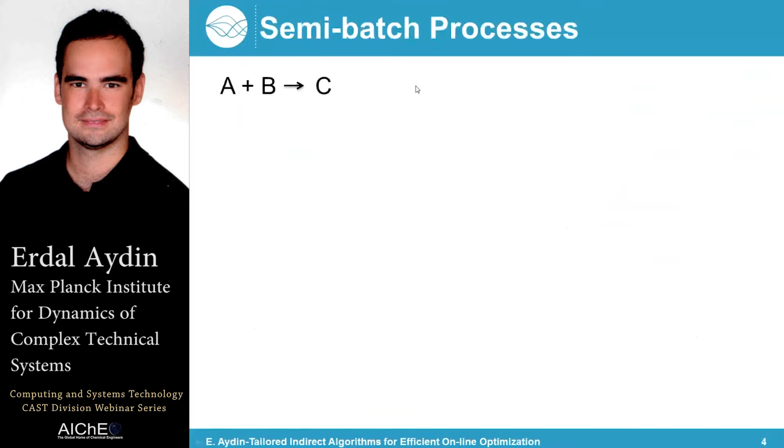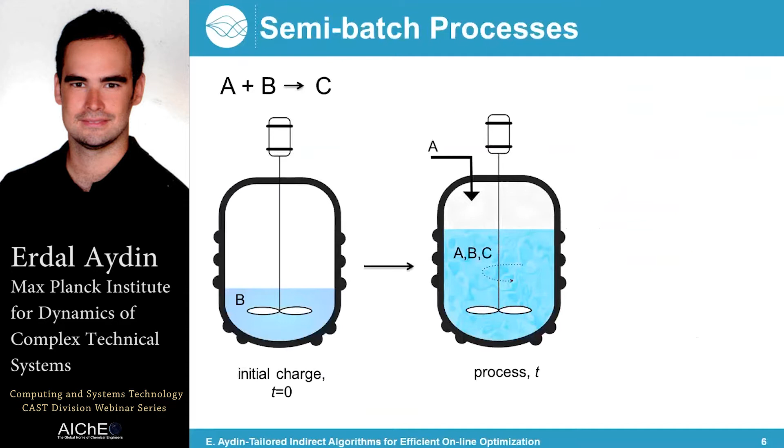Okay, let's start with the semi-batch operation. So let's assume an elementary reaction where A and B go to C. We would like to operate semi-batch wise. So we start with some of the raw materials in the reactor when time is equal to 0. Then we basically feed some of the raw materials inside the reactor. This can be a one-phase, two-phase, or multi-phase system.

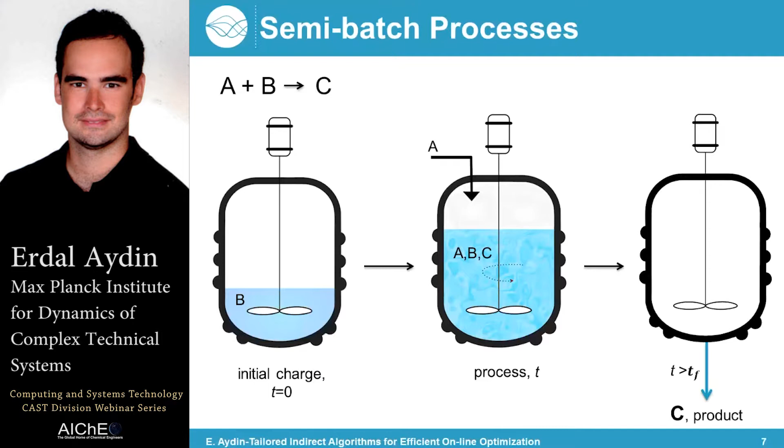We basically employ the process. And at the end of the day, after the final time of the process, we get the product C after maybe some downstreaming, or if you're lucky enough, just at the end of the batch time. Typical examples are pharmaceutical industries or some biopharma applications. Car driving can also be considered a semi-batch process, as well as cooking. And nowadays our microchip industry works quite a lot with semi-batch processes.

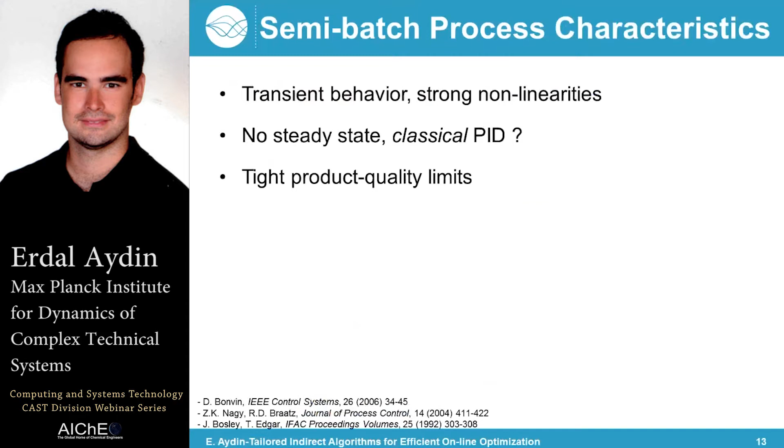So what are the characteristics of these processes? Well, they have quite transient behavior and strong nonlinearities. In addition, they don't have any steady state, which puts a question mark on classical PID algorithms. We have tight product quality limits to be able to sell these products. And one of the problems is that our flexibility reduces with time as the batch goes on.

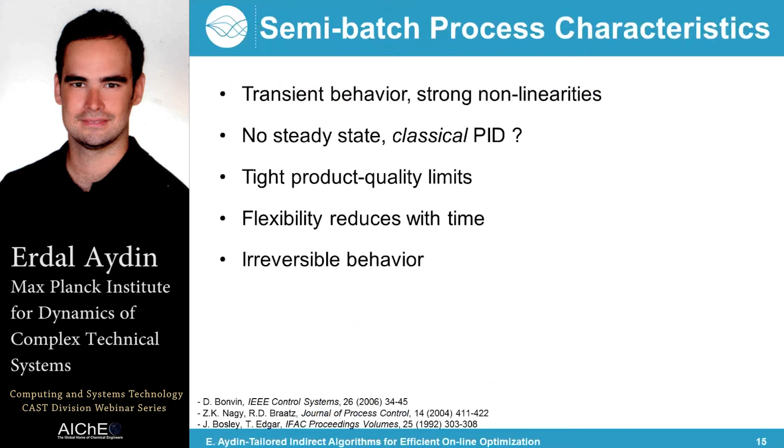So if you have any problem in the beginning of the batch, and since we also have irreversible behavior, at the end, if you're making a mistake, we usually end up losing the batch. And we have quite some uncertainty in our model equations and limited measurements. So in the literature, shrinking horizon NMPC is prescribed as a solution technique to tackle these issues.

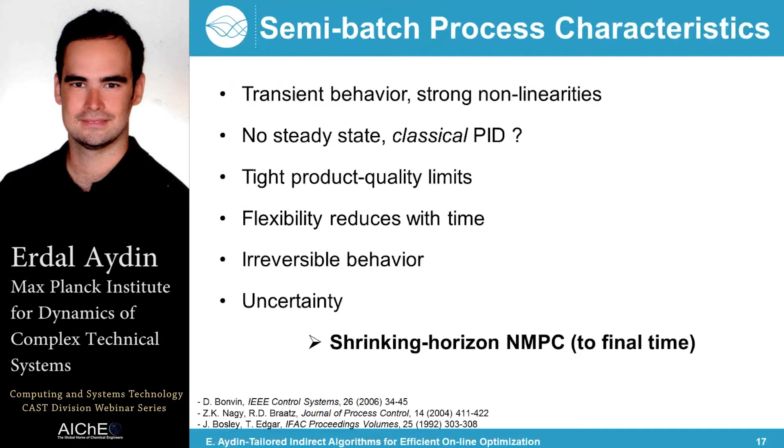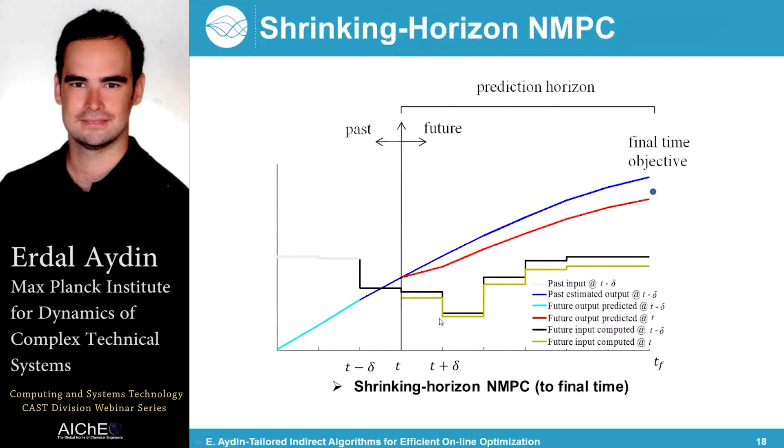The idea is basically to do dynamic optimization always until the end of the batch time and update our optimal inputs at each sampling instance until the final time. It's basically doing successive dynamic optimization and doing some estimation or measurement until we reach the final time. So let me elaborate this with a small simulation case.

So we basically have a cost function in our dynamic optimization problems, which can always be formulated at the final time of the state values. We have equality path constraints, usually given as ODEs for semi-batch processes, with pre-given initial conditions. In addition to that, we have some inequality path constraints to be satisfied at each time instance, as well as some terminal constraints, which should only be satisfied at the end of the batch time.

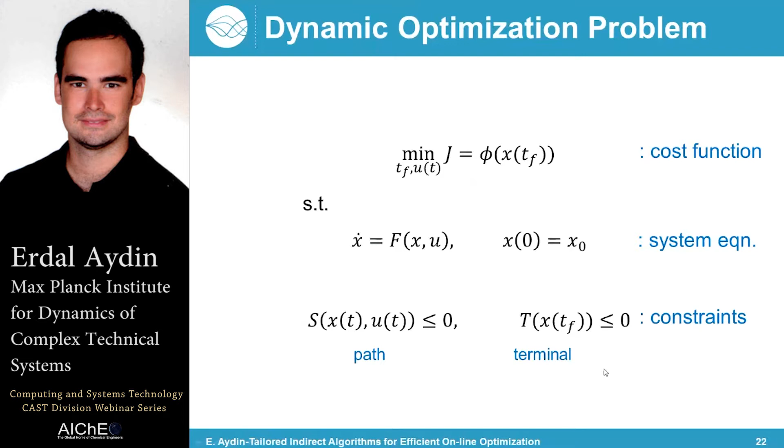So, numerical solution methods for dynamic optimization problems can be divided into two topics. One is the direct methods, and the other one is the indirect methods given by the Pontryagin minimum principle.

So the direct methods are usually called first discretize, then optimize, whereas in indirect methods, we basically optimize the problem first and then discretize to get the optimal solution. In direct methods, we can also talk about two main branches, which are sequential and simultaneous methods. In sequential methods, we basically discretize our inputs, but integrate our state equations to get the optimal solution.

Basically, we're doing integration until we reach the optimal point. But since we're trying to also make our path constraints feasible, this method can sometimes be considered expensive for inequality path constraints. In terms of simultaneous methods, we both discretize our inputs and state equations. There is usually a trade-off between approximation and optimization while we're going to the optimal solution, but simultaneous methods are known to be usually efficient for large-scale problems.

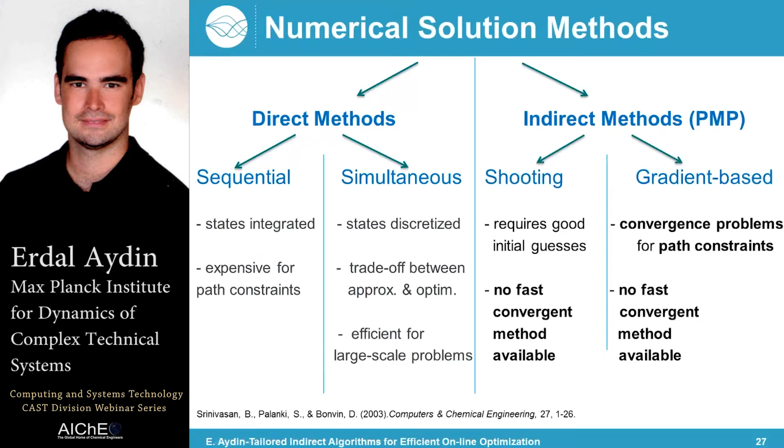In gradient methods, we usually do not require that good an initial guess, but these methods are also known for having convergence problems for path constraint problems, and they also usually turn out to be slow in the literature. So today I will propose a convergent method which is tailored to be efficient for path constraint problems.

Now a few words about shrinking horizon NMPC again. In shrinking horizon NMPC, we always need to employ the dynamic optimization until the end of the batch time. If we use direct optimization methods to do that, we need to employ expensive matrix factorizations due to large prediction and control horizons, or large input discretization levels, which means large prediction horizon lengths. Due to these matrix factorizations, the computational complexity usually increases as the cube of the time horizon.

Now, if we talk about direct interior point simultaneous methods, this is the linearized KKT matrix that we need to solve. The last row can be eliminated and solved explicitly during the iteration, which brings about this symmetric linearized KKT matrix.

The optimization methods available in the literature can be exploited to be efficient, like using their sparsity, special linear algebra, or cyclic reduction, especially from the group of Professor Biegler and Professor Zavala. This is a hot topic right now. There are also works proposing sensitivity-based updates for these methods, advanced step or real-time tailoring algorithms from the group of Professor Moritz Diehl. These are other ways of dealing with matrix factorization costs.

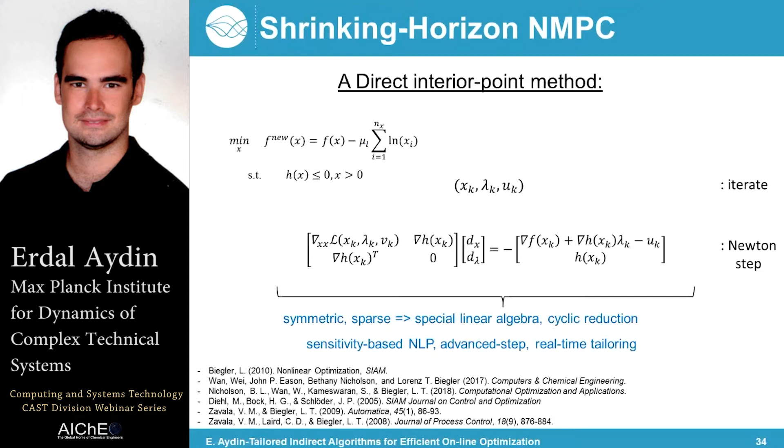But today I will talk about an alternative way using indirect methods to deal with this computational complexity. If we can tailor these indirect methods, we can get the computational complexity to increase linearly with the time horizon. Professor Mark Cannon from Oxford has already published papers on this for input constrained linear systems. But we will extend this method to be convergent for path constrained, nonlinear dynamic optimization problems. And we hope to get real-time computation faster than commercially available methods.

Okay, so this was basically about dynamic optimization. Now let's move on to the tailor-made indirect methods. Pontryagin was the person who proposed the Pontryagin minimum principle, which was basically the extension of the Euler-Lagrange equations.

The interesting thing with Pontryagin is that he lost his eyesight at the age of 14 due to an oven explosion at his home, but he was able to finish school and became one of the most well-known mathematicians of the 20th century, and his mother was the one reading books to him when he was studying.

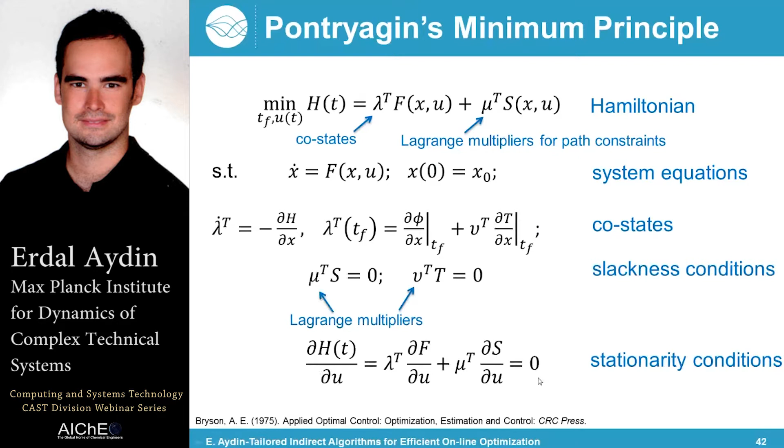So please recall that I mentioned the indirect methods can be non-convergent for path constraint problems. The reason is actually these Lagrange multipliers. You can see that we know the dynamics of other multipliers, but we have no clue about mu values. And if we try to update them at each iteration by using some shooting method, this can be costly. And at the end of the day, we may not even reach an optimal solution. We may not converge.

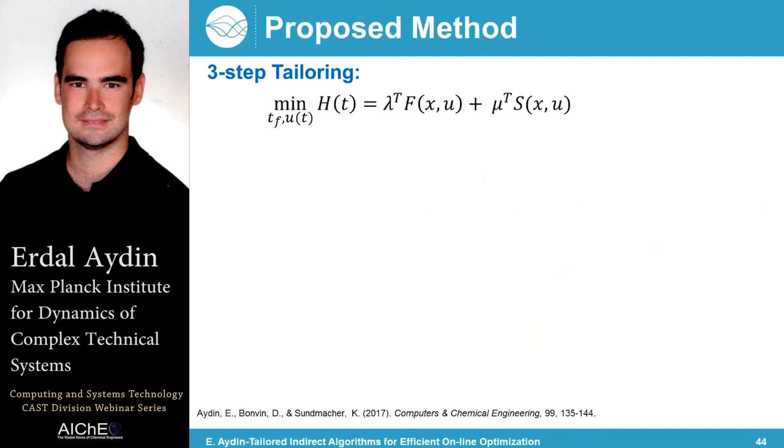So we basically propose a 3-step tailoring algorithm to cope with this issue. The first step, let's say that we're not that much interested in the exact value of mu. We just choose a penalty value or tune a penalty value to ensure feasibility, as a version of barrier type, instead of parameterizing and shooting for this value.

And let's say that we use some logic conditions. If you're inside the feasible region, we set this value as 0 to satisfy this KKT condition. Or else, if we are outside the feasible region, if our iterate is infeasible, we just tune a penalty value to be used for this, as well as for the terminal constraints.

Secondly, we propose indirect adjoining to be used for pure state path constraints. By pure state path constraints, I mean the path constraint is only dependent on the state values. So we basically take the time derivative of this until we get the explicit inputs inside it, and then replace the original path constraint with the indirectly adjoined path constraints. So we know that this value should be 0 at the KKT, and also its derivative should be equal to 0.

Let me illustrate that with a case. So let's say that we have a tank. We're basically dosing some water inside it. And we have the path constraint that the volume should be less than or equal to 1.1 liter. So our original constraint is V minus 1.1 less than or equal to 0. We take the time derivative, and we have V dot less than or equal to 0.

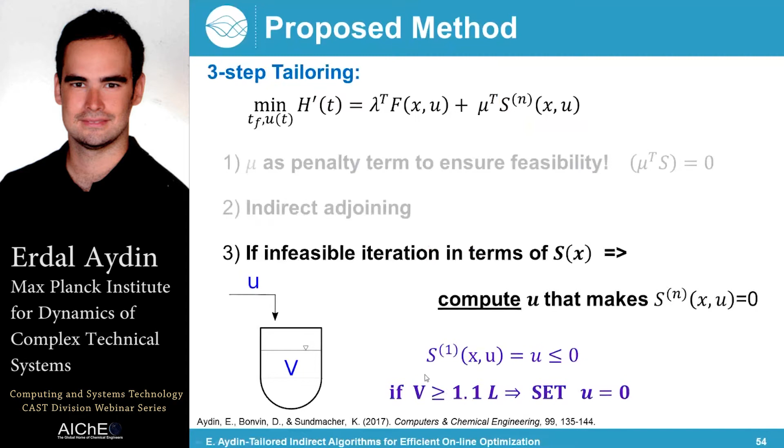So let me go back to our tank example. Our constraint is on this U. So if the volume is higher than or equal to 1.1 liter, we basically set U equal to 0, which makes sense, right? After this point, we don't dose, and we keep this feasible.

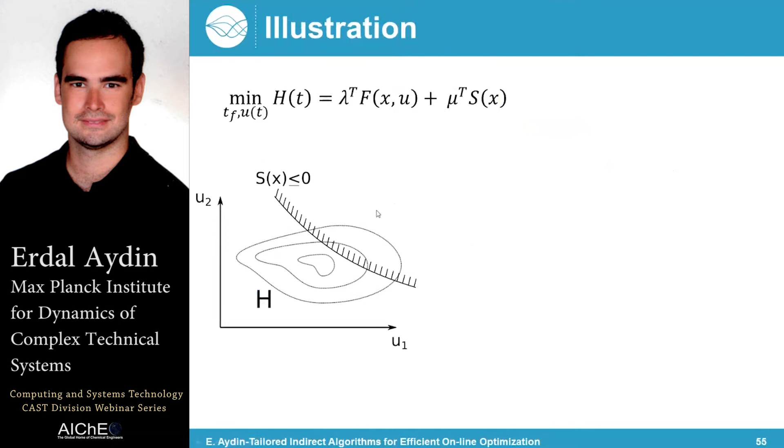So one last illustration about this. This is our original path constraint and the original problem. We reformulate it by using indirect adjoining like that. And then, at some infeasible iteration, we basically put the iteration to be active on this path constraint. We will see that for semi-batch problems this will work, because usually the optimal solutions of semi-batch problems are designated by active path constraints. I will be talking about this in a bit.

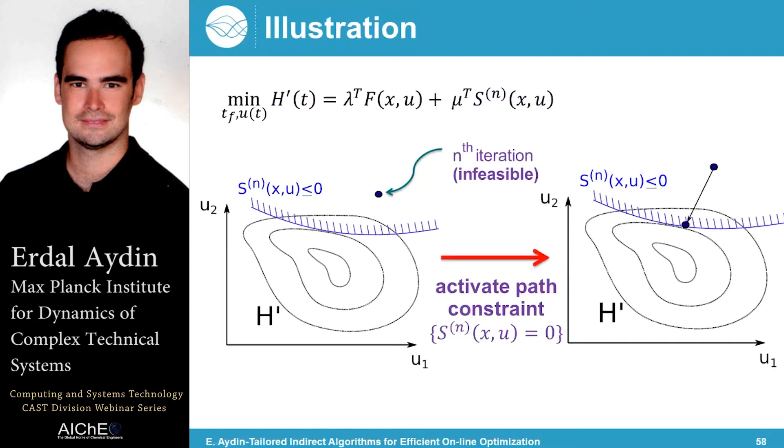Okay, so by doing this three-step tailoring, we reformulate the original indirect problem, and we use logic decisions to activate the path constraints. That's why we can eliminate the mu values from the problem. And we basically integrate for lambda dot, the adjoint multipliers, and the state equations. And at the end of the day, we are projecting the gradients related to the indirect methods, and we can solve the original problem as an unconstrained optimization problem by using some quasi-Newton algorithm. So basically, we just need to update the input values in this iteration scheme.

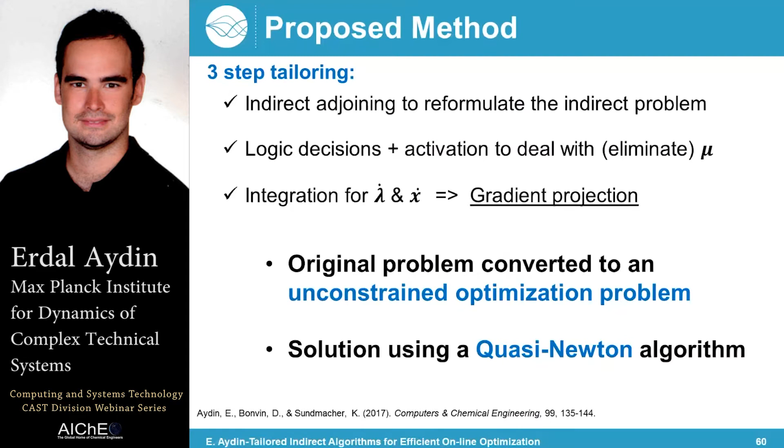Okay, now let me move on with our first case study taken from this paper in the literature. We have a fed-batch reactor. Our aim is to optimize the amount of C at the end of the batch, which is half an hour. D is the product that we don't want. So we have some input constraints for this dosing. We have temperature limits on the batch reactor.

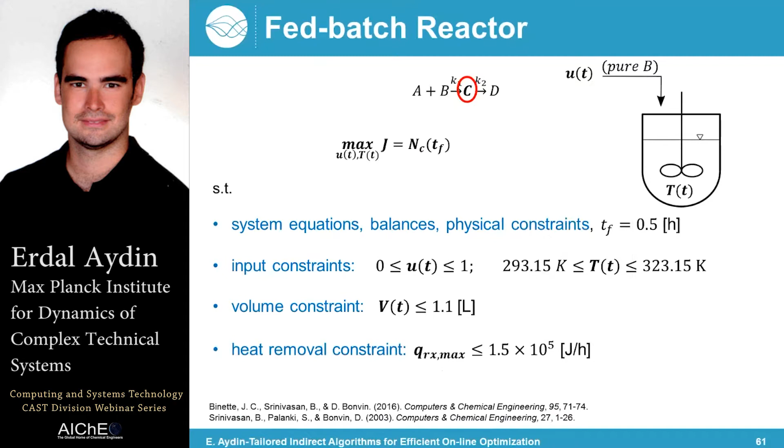Semi-batch reactor. We have a volume constraint that we just talked about, and we have some heat removal constraint, which is basically 1.5 times 10 to the 5 joules per hour. We shouldn't reach this value during the operation. All right. So we solved this problem by the proposed PMP-based method, and we took the analytical solution number 2 from this paper published in Computers & Chemical Engineering 2 years ago.

So if you solve this problem by these two methods, we can see that we don't get the exact optimal values, but we get the exact sequence of the optimal inputs. So both dosing and temperature behave the same in terms of solution arcs, and at the end of the day, we get very similar optimal solutions. So we basically approximate the optimal solutions here, but since we have very similar cost values, we can say that it is catching the optimal behavior in some sense.

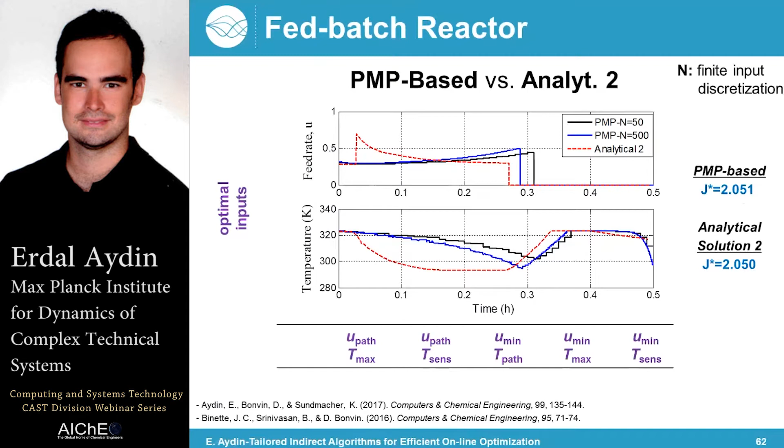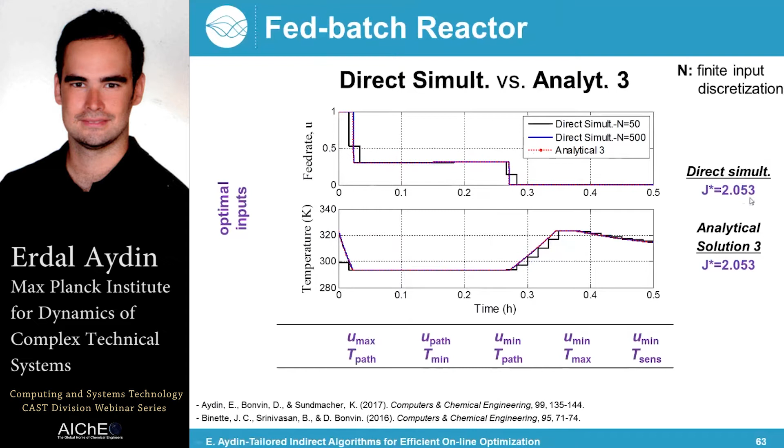We also solved this using a direct simultaneous method by using IPOPT and compared with the analytical solution number 3. We see that both also propose a different input sequence than the analytical solution 2 and PMP, but at the end we also get very similar optimal objective values. So we can say that we get different local solutions with all methods actually, different five-arc type solutions, but we can get nearly the same optimal costs with considerably different input profiles.

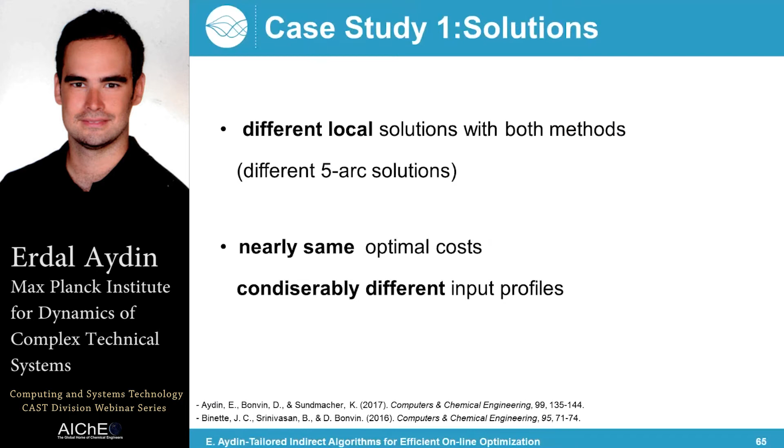Well, we saw that, but what about the computational time? If we compare the computational time with the direct simultaneous and PMP-based methods, we can see that when the discretization level is getting higher, our computational cost increase is not that considerable with the indirect, PMP-based method, whereas with the direct one, the computational cost is increasing a little bit faster. And the thing is, we need to solve these matrix factorizations for larger input discretizations.

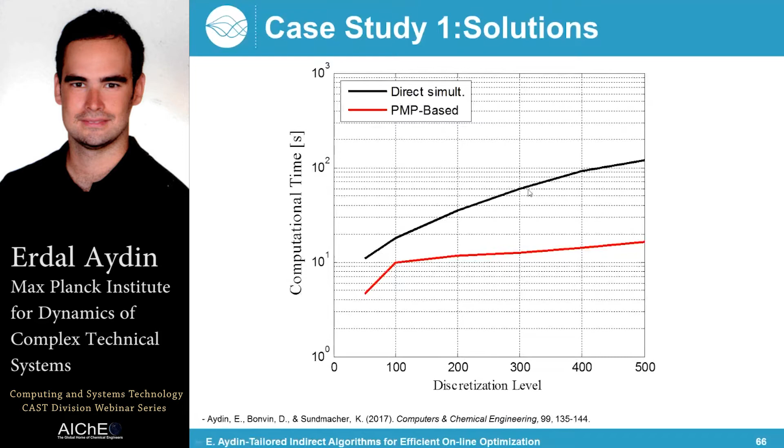This expands our matrices, and factorizing them is getting a bit more expensive than the indirect one. In the indirect one, we basically attach to integration, and we know that integration is efficient for higher input discretization, whereas these matrix factorizations are getting problematic as the horizon increases.

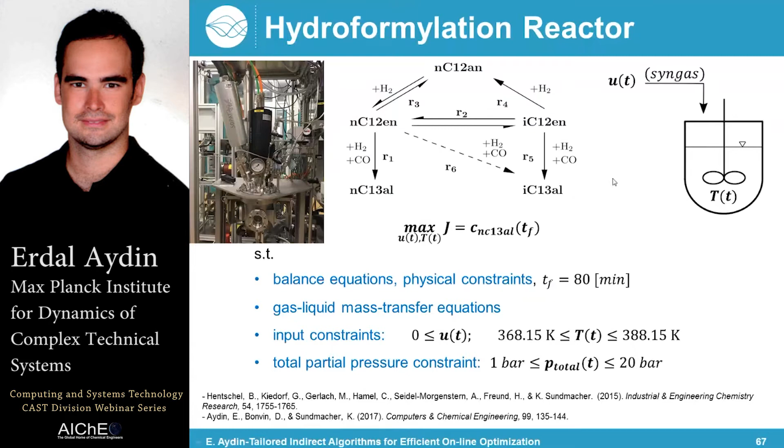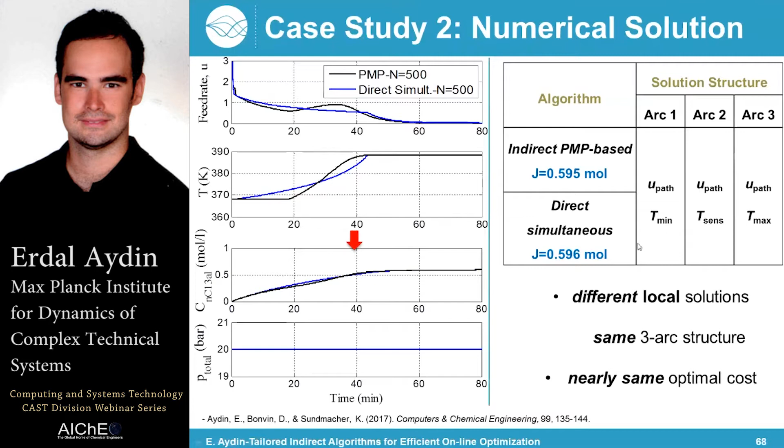But I need to again mention that this is an approximation, and since we are more interested in the online optimization cases, we basically stick with the speed of this indirect method, with very close approximated optimal cost values. All right. So this was basically the indirect algorithm, the first one that we proposed. Now let's move on with the online optimization case studies.

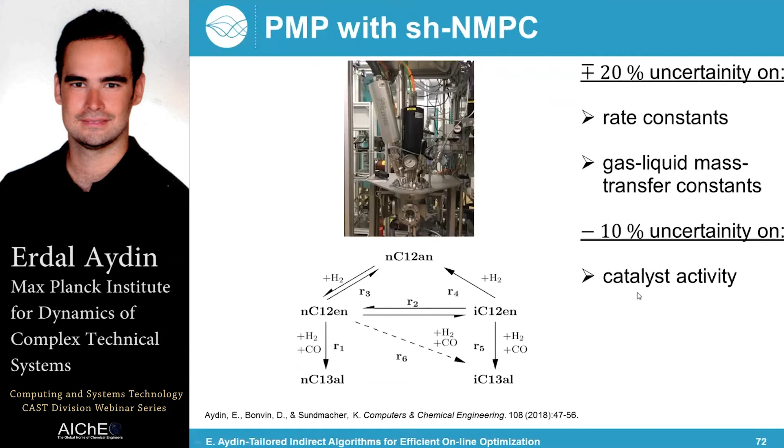So let's again go back to the hydroformylation case. Now we assume a parametric uncertainty on the rate constants of the problem, as well as the gas-liquid mass transfer coefficients, plus minus 20%. And we also assume an uncertainty on our catalyst activity. And we try to solve this problem by using the nominal optimal input we got, so by not taking the effect of uncertainty into account. Now, if we apply this, we see that our path constraint, our pressure constraint, cannot be satisfied, and we have a desired product level of...

So we have a loss of 15% desired product as opposed to the nominal case. That's why we say that employing some online optimization by using shrinking horizon NMPC can be more efficient in terms of production. And we do that to deal with the effect of the uncertainty on the path constraint. We basically employ some time-varying backoffs.

These backoffs can be computed by doing some Monte Carlo simulations. They are kind of computationally complex, but I need to mention that we can do it offline before starting the online optimization. We assume a 15-second sampling time, and we also introduce 5 seconds of measurement delay, which is more close to the reality with practical operations. We use a linear observer, and we introduce some white noise into our measurements.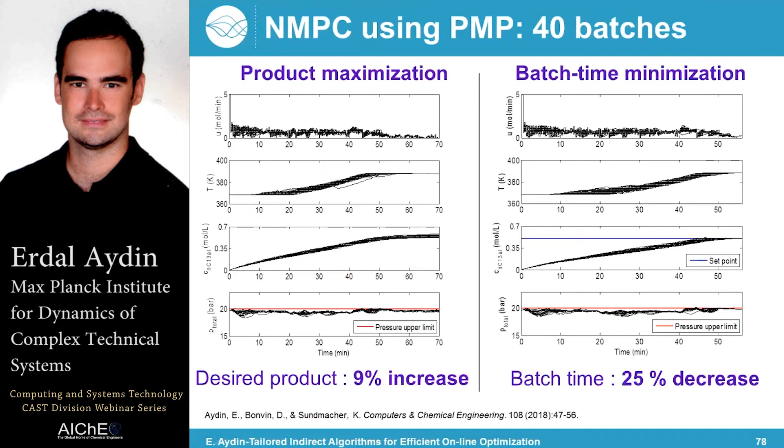All right. Now this was the fully parameterized PMP-based method, but we can also suggest a further tailoring method to be applied to this indirect method, which is called parsimonious parameterization. So in dynamic optimization problems of semi-batch processes, we see that an input solution arc can be either on a lower or upper bound of an input, like Umin or Umax. It can be on a path constraint, which activates this path constraint, and in this case, we can compute this value by system equations.

Or it can be inside the feasible region, and we call these kinds of inputs sensitivity-seeking arcs. So these four are the only possibilities for the optimal solution. We can categorize our optimal solutions by using these arcs. I also did that when I was talking about the case studies with the tailor-made indirect methods.

So we know that these sensitivity-seeking input arcs are usually hard to compute accurately because their contribution inside the sensitivity equations is quite low. And they also negligibly affect our optimal cost. So we're paying a lot of attention to compute the fine shapes, but at the end of the day, we're not getting that much improvement in our optimal cost.

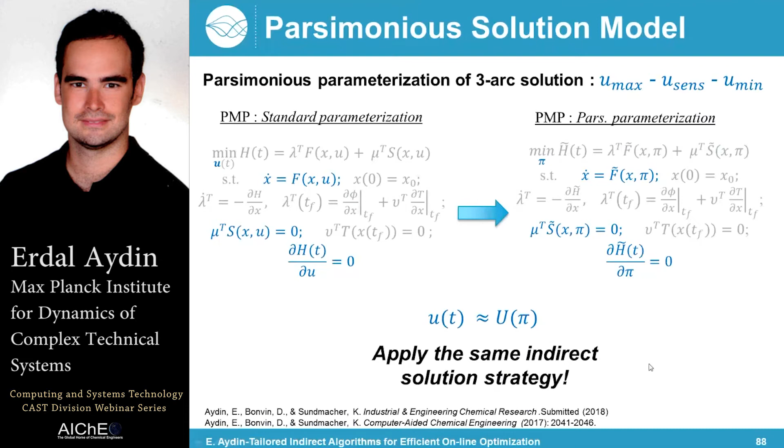Now, let me introduce the case study of a batch binary distillation column. It's a toy example actually; we basically have three stages. We assume a total condenser here. So we have the dynamic system equations and pre-given initial conditions. Our target is to optimize the distilled content at the end of the batch, so the value here.

We have the input constraints. Actually, we have only one decision variable. This is the internal reflux ratio, and it is constrained between 0 and 1. And if you want to solve this problem, we need to have terminal purity levels of a minimum value of 80% of the desired product here, and in the bottoms we shouldn't have more than 20% of the desired product.

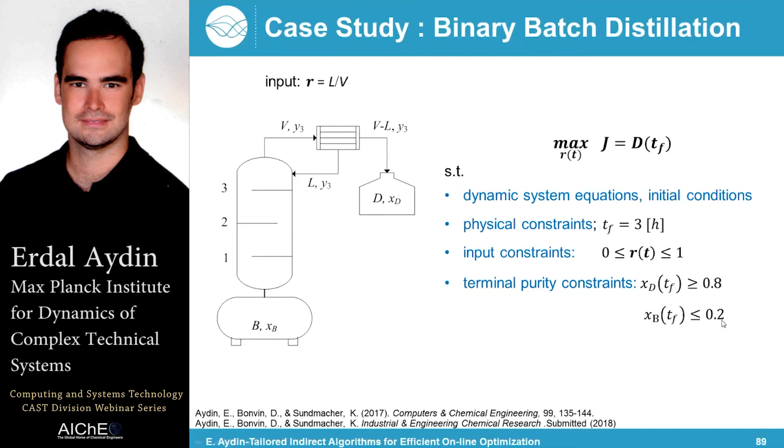First of all, we use the fully parameterized solution with 500 input discretization levels, and we solve the problem by using a direct simultaneous method. This is the optimal solution. We can see that our optimal sequence of inputs has three arc types, starting with the maximum allowable level, then following a sensitivity seeking arc, and finishing off with the minimum value. And we get something like 40.31 kilomole at the end of the batch time, and our distillate and bottom composition purity levels are satisfied.

Okay, now let's assume a constant value of the sensitivity seeking input, and we introduce some switching times. Here we can see that the solution switches at this and at this instant. So instead of the whole parameterized solution, we can map our input vector by only three decision variables here. And let's solve this problem.

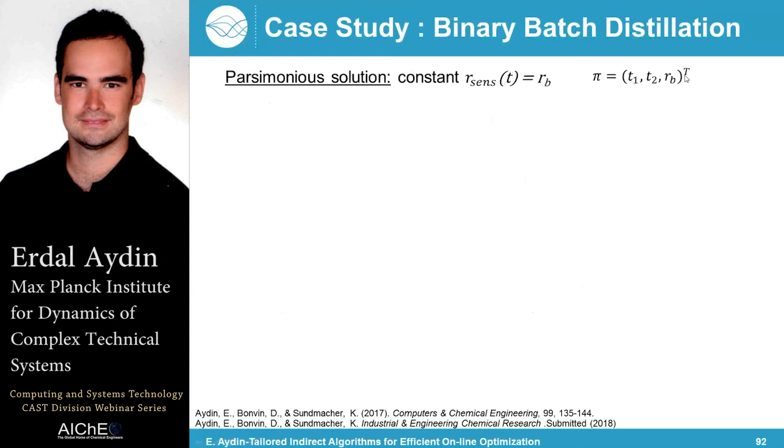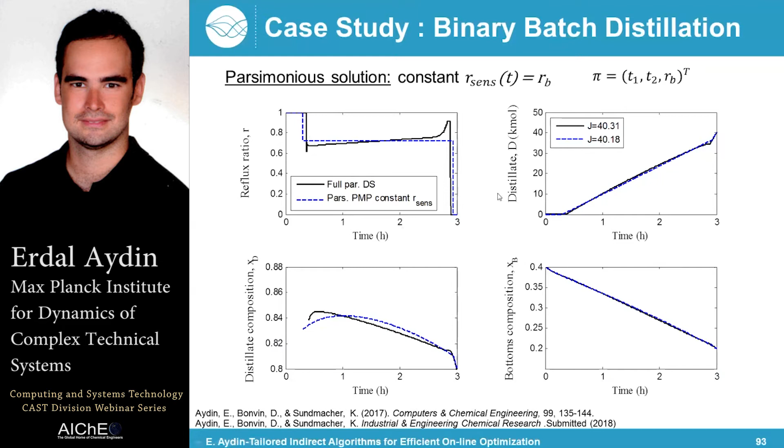If we do that, we see that this sensitivity seeking arc can be approximated by this constant value, and at the end of the day, we can get a very close optimal solution as opposed to the fully parameterized direct simultaneous method. And these are the optimal inputs of our input levels. Actually, here it's the global solution, and we only use three decision variables to approximate it.

Further, we can also assume a linear relation for the sensitivity seeking arc. This way, we introduce again two switching times and two different values which characterize the beginning and the end of the sensitivity seeking input. And we use this linear relation to compute the other values during the optimization iteration.

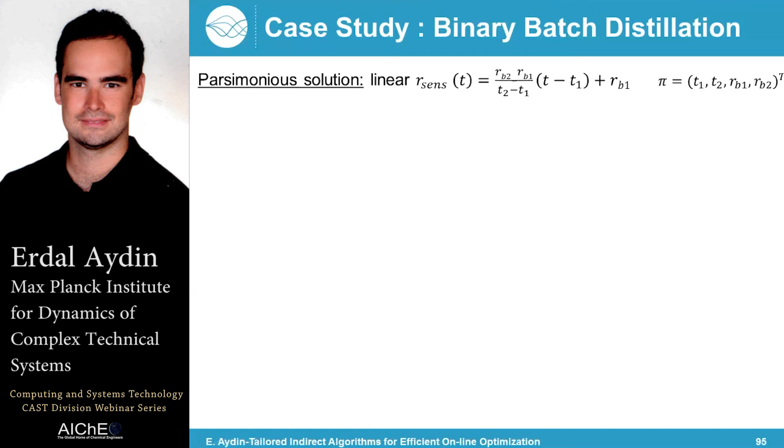If we solve this problem, we see that we can even improve the optimal cost in terms of the desired product. And only by introducing one more decision variable, we can have only 0.15% optimality gap as opposed to the fully parameterized solution.

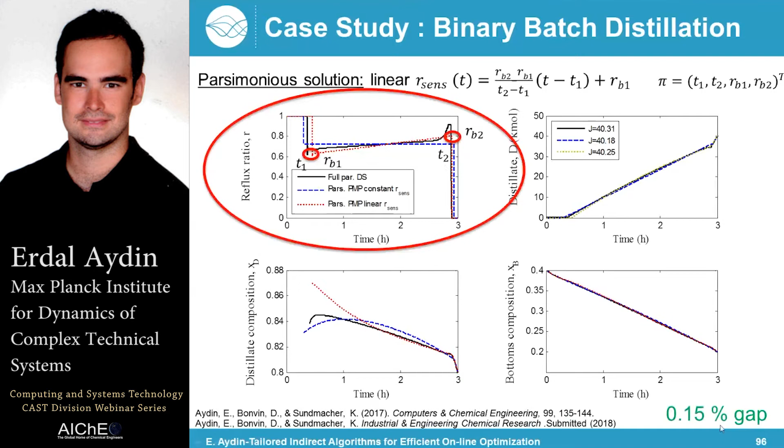Now let's see if we can apply this to a shrinking horizon NMPC. Because we know that instead of 500 decision variables, we only have 3 in this case, and this is a less complex dynamic optimization problem. In the end, we have less computational load, or we can end up with faster solutions.